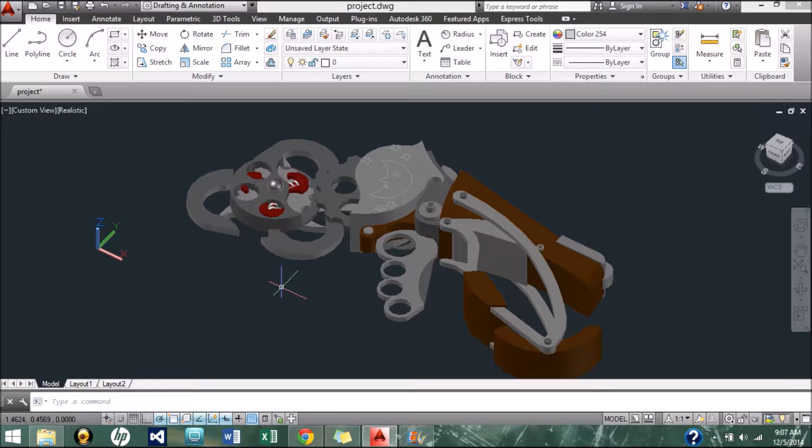I am a student at Texas A&M International University, and today I will be showing you how to design the rotary motor on Bioshock Infinite's melee weapon known as the Skyhook. For this tutorial, I will be isolating the rotary motor and creating the outer part of it, which is the area I'm pointing at right now. I will be using the dimensions I used for my project, however you can use whichever dimensions you would like, as long as they're proportionate and properly scaled.

We will start this tutorial by first creating a circle. We will specify the center for the circle. Then we will be using the diameter for it, not the radius. So we'll select D for diameter and give it a diameter of 0.74. This will act as the size for the rotary motor we will be using for this tutorial.

Next, we will draw another circle. It will have the same center as the circle we just drew, but this time we will be using the radius, and we will give it a radius of 0.11. We will repeat this step once again, drawing the circle with the same center point we've used before, but this time the circle will have a radius of 0.07.

Now that you've drawn the circle, we've created the basic structure for the rotary motor. Next, we need to draw the circles where we will cut the holes on the rotary motor itself.

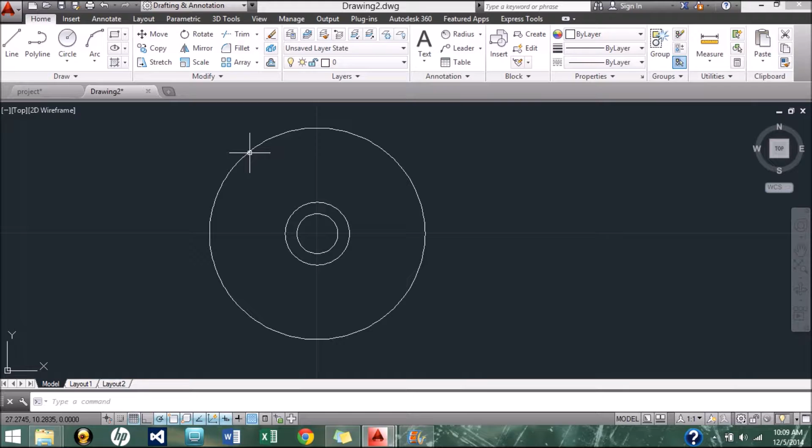We will start off by first drawing a line that starts from the center of the circle. Just remember that all circles we've drawn so far share the same center, so when I say select the center of the circle, it's the same center for all three. That'll be the first point for a line, and then our line will extend upwards at a 90-degree angle to a length of 0.37.

Now that we've drawn this line, it will act as a guide to draw the lines that will show where the circles will be located.

Now we will call out the mirror command. We've already selected our line that we want to mirror, and we will select the first point for the mirror as the center of the circles. Now it asks us to select the second point for the mirror, or we can select the angle. For this, we will use the angle, and the first one will have an angle of 304. We will not erase the source object, so we will select N, and there you have it. That's the first line for the first circle we will be drawing.

We will repeat the step once again. We will select the line, call out the mirror command, select the first point which is the center of the circles, and now we will draw this second line with an angle of 338. Once again, we will not erase the source object.

Now we will draw the last line for the circles. We will select once again the line, call out the mirror command, select the first point to be the center of the circles, and now we're going to give this line an angle of 13.

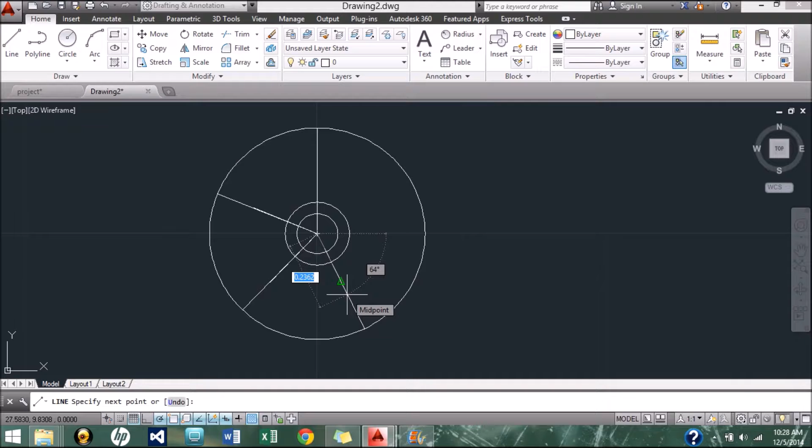We will select the line command, select the same center point as before, and we will extend 0.2350 on the second line we drew. So there we have the new center for the second circle. Now we will do this again: we will select the center point and extend on the third line by a distance of 0.2350. There you go, so we now have the three centers for the three circles we will be drawing.

Now we have the position of the center for the three circles, so now we can start drawing them. You can select whichever of the lines you want to use to first draw your first circle.

First we will specify the circle command. Now we have to specify the first center point, so I'm going to specify the first line as my center point. And then I'm going to draw a circle with a radius of 0.1044.

Now we can draw the other two circles, or you can simply copy the circle onto the other two. I'm going to be copying the circle we just drew. So I'm going to click the copy command, use the center point as a reference, and then just copy them onto the other two lines. There we have it — we've drawn our three circles where the holes will be located for the rotary motor.

Okay, so now we're moving to a slightly more difficult part, which is pretty much trimming the largest circle. We can either draw two new lines to specify where the circle will be cut, or simply extend the lines of the upper and lower circles we just drew and use those as reference points. For this example, I will use the lines we just drew, extending them outwards and making them perpendicular to the circle.

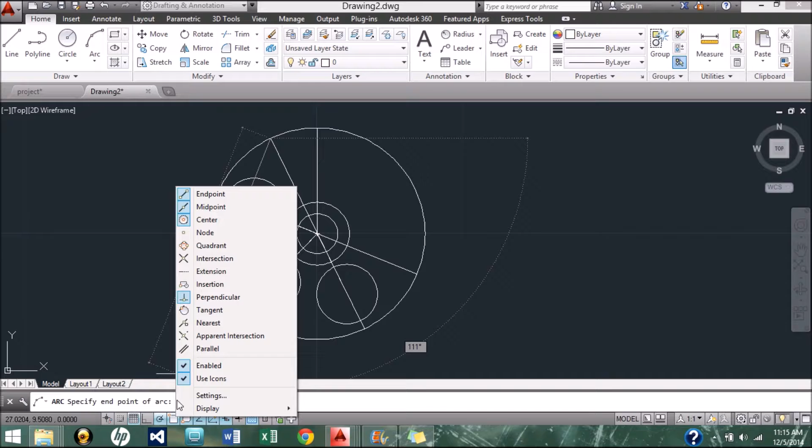Let me turn on my quadrant since I have it off right now. Alright, there we go. So we specify our end point to be the top quadrant for the circle with radius 0.11. Now it'll ask us to specify the center, angle, direction, or radius for the circle - we'll use the radius and give it 0.1994. There we go, we've drawn our first arc.

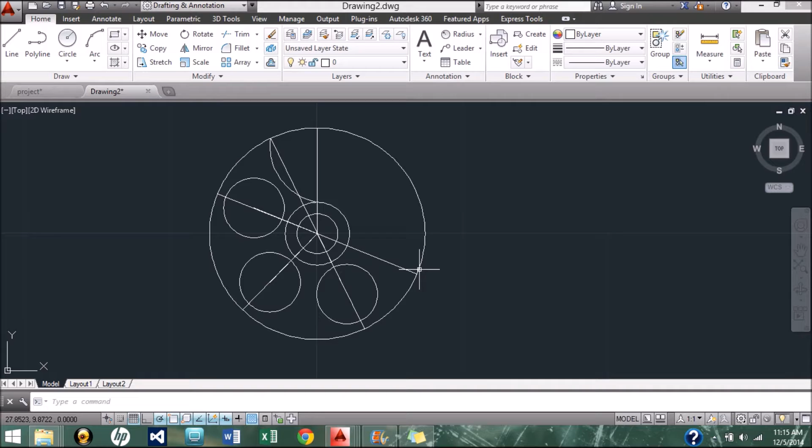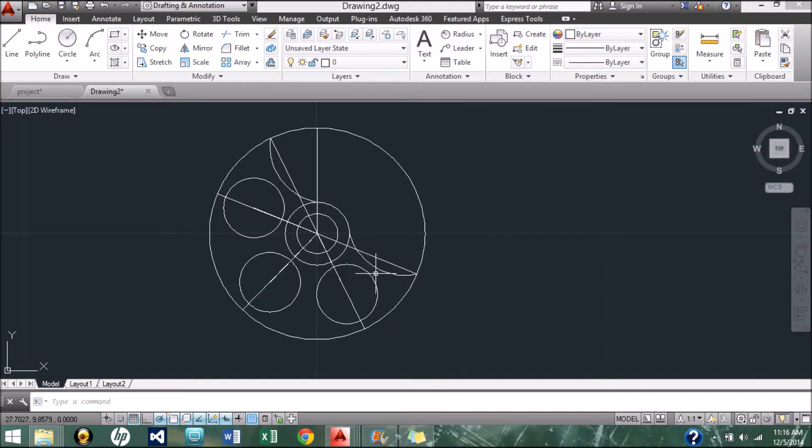Now we can simply mirror the arc or draw it again. I'm going to draw it again for this tutorial, selecting the first point to be the quadrant of the circle with radius 0.11, then specifying the end point to be where the line and the circle intersect, and once again giving it a radius of 0.1994 for our third point. There we go, we've drawn our two arcs, and now it's looking more like the shell for the rotary motor.

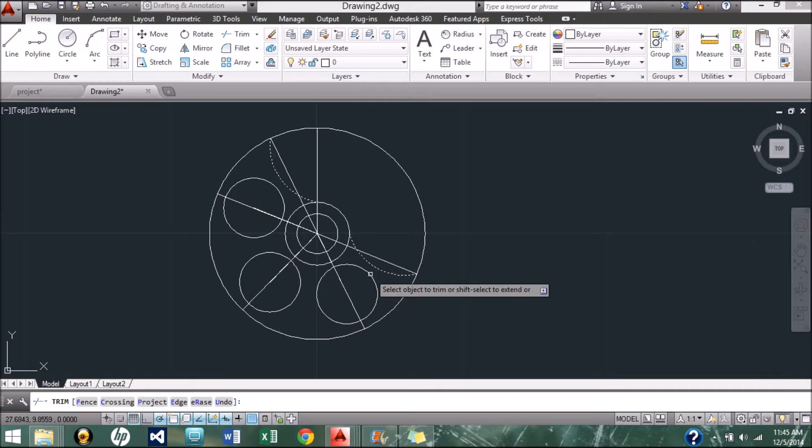Now we can begin deleting reference lines and trimming the outer circle by selecting the two recently drawn arcs as our selected objects. We will select both arcs, call out the trim command, and select the outer circle and the circle with radius 0.11 to trim them out. Now that it's been trimmed, let me clean it up a bit - you can see it's already taking the shape of the rotary motor.

Now all we have to worry about is transforming all of this and making it 3D. Before we can make it 3D, I have to make each of these lines into one region itself, since right now they're all separate lines. So I'm going to call out the region command, click on all the lines I want to turn into one region - all of the outer lines - and select enter. There we go, now we have one region.

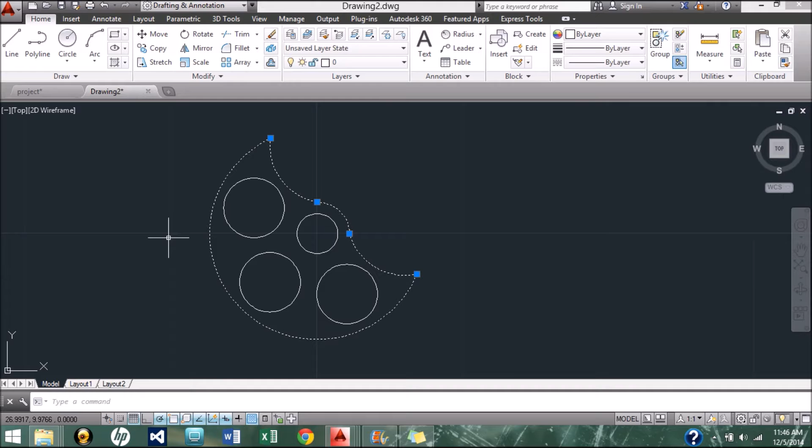If for some reason it does not work for you, make sure to check that all lines are connected to each other, that there are no gaps or overlaps.

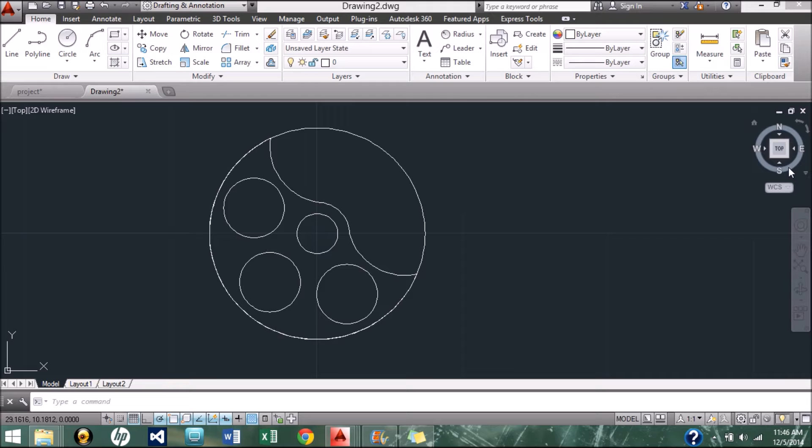But anyways, before we extrude, we will draw another circle taking the center we've been using since the beginning, giving it a diameter of 0.74. It's like the original circle we drew first, but this one will be extruded downwards.

So let us extrude our new region upwards at a distance of 0.24. Let me just type 0.24 for the distance. Now there we go, we've extruded the region.

Now let me extrude all of the circles, and these will be extruded upwards a distance of 0.2455. So there won't be much of a difference, but it'll be a subtle difference.

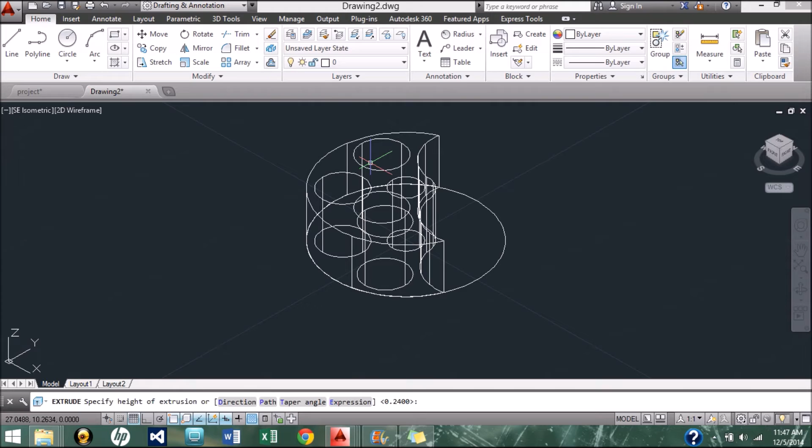Alright, after we've done that, let me quickly make it shaded with edges so we can see it a lot nicer.

Okay, after we've extruded these circles, we will now extrude the largest circle we drew at the very end, and we're not going to extrude it upwards like the rest - we're going to extrude it downwards, at a distance of 0.12. So it's not going to be that great of a distance. There we go, that will be our essential shape in 3D format for the shell of the rotary motor.

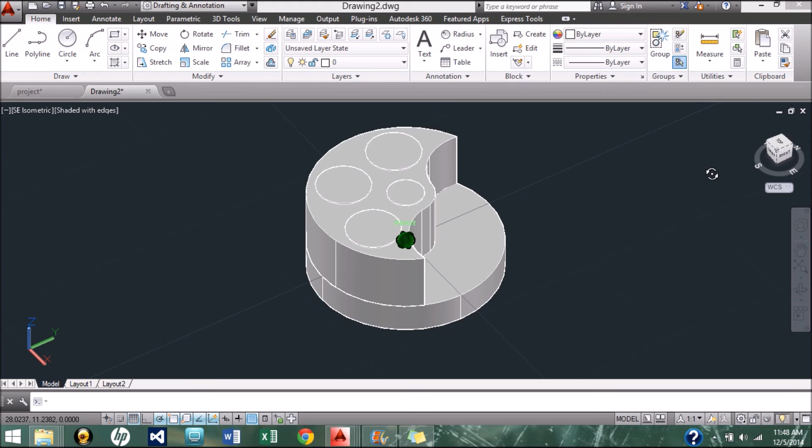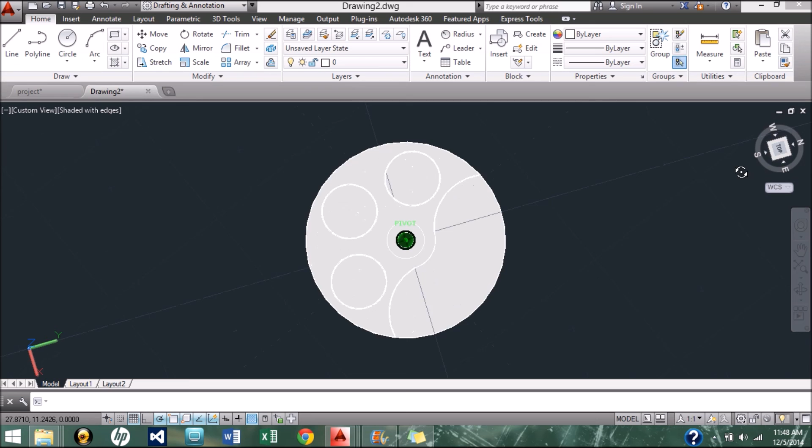But before we can finish, we have to subtract the three circles we drew at the beginning from the shell of the top part of the rotary motor. So I'm going to call the command subtract, select the top part of the shell, click enter, then select the three circles, click enter once again - and there we go, we've subtracted the circles from the upper shell of the rotary motor.

Okay, so that will be all for today. This is pretty much the basic structure for the shell of the rotary motor.